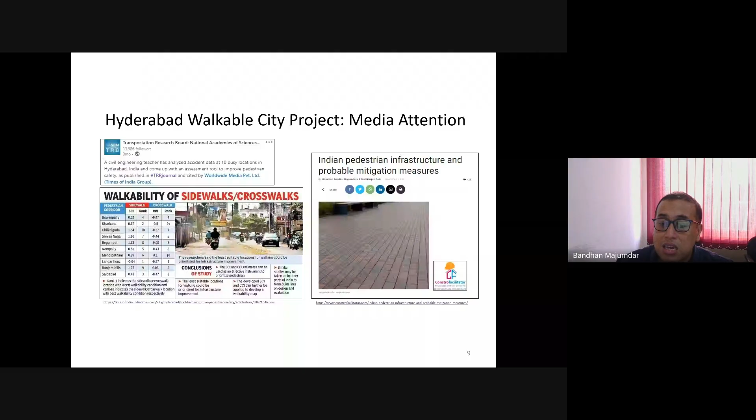This is the Hyderabad walkable city project, where we found out what can improve Hyderabad walkability. This was funded by an NGO. We have also done a Hyderabad Safe City project where we evaluated the entire Hyderabad safety, funded by DST SERB, and some daily newspapers, local as well as national level, reported on that.

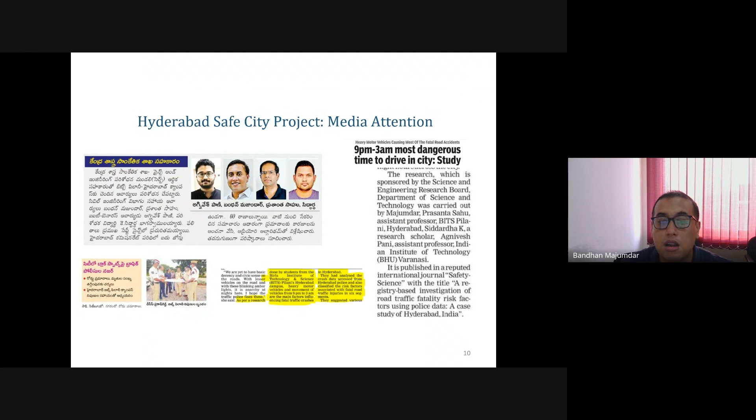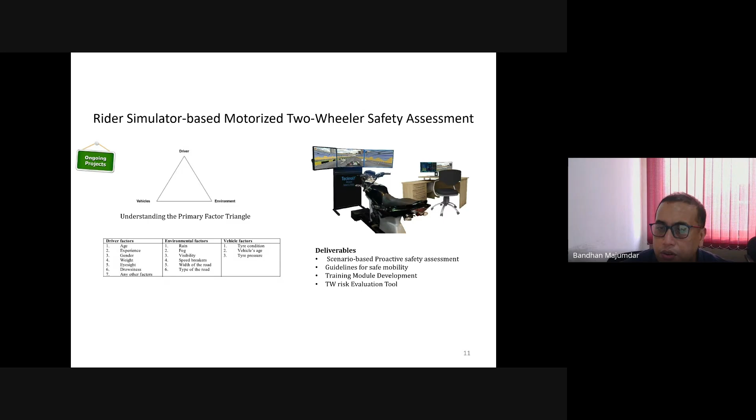We are also doing a project funded by another company, ITSP, where we are providing a complete end-to-end solution for someone who wants to park and ride - multimodal option, parking guidance, park and ride solution, and prioritizing transport all under one application.

We are also developing several 3 or 4 projects, and couple of projects are not here as well, where we are trying to understand how e-mobility or electric mobility through electric bicycle or electric cars can be a successful mode, and we want to test whether people are really going to use that. These are all funded projects - 2 funded by BITS Pilani itself, and 1 funded by Indian Council for Social Science Research, where we are working on different things.

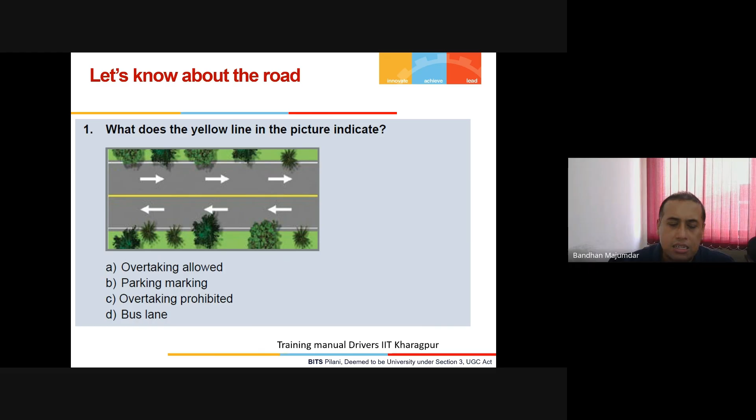So first, let me ask some questions. I am sure a good number of our participants have a driving license, or even if you do not have one, that's okay - maybe budding drivers. So can anyone unmute and tell me what does the yellow line in the picture indicate? A, B, C, D. A participant answered: overtaking prohibited. Very good, this one.

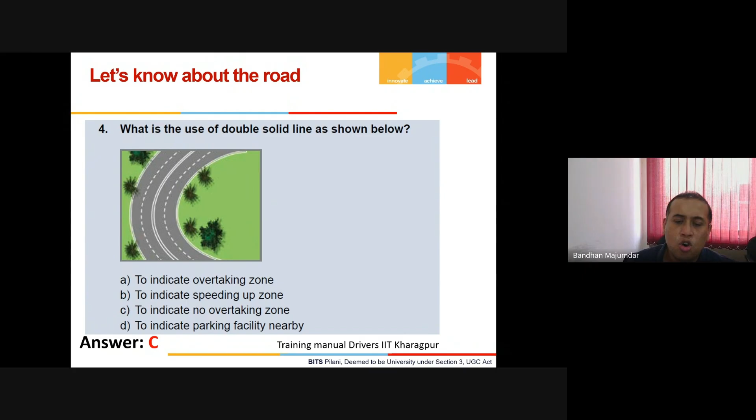To indicate no overtaking zone. This one, can someone unmute and tell?

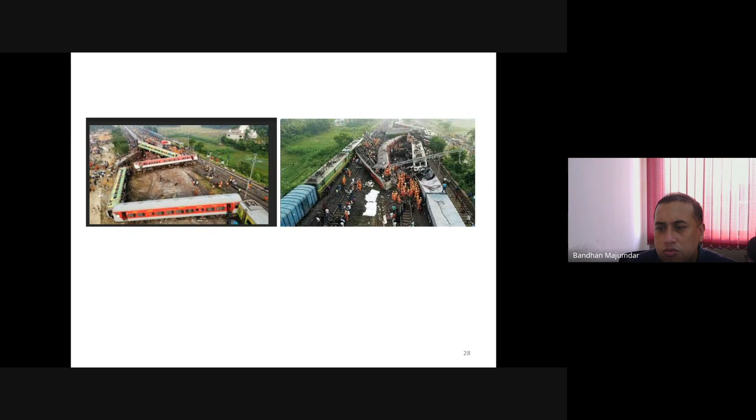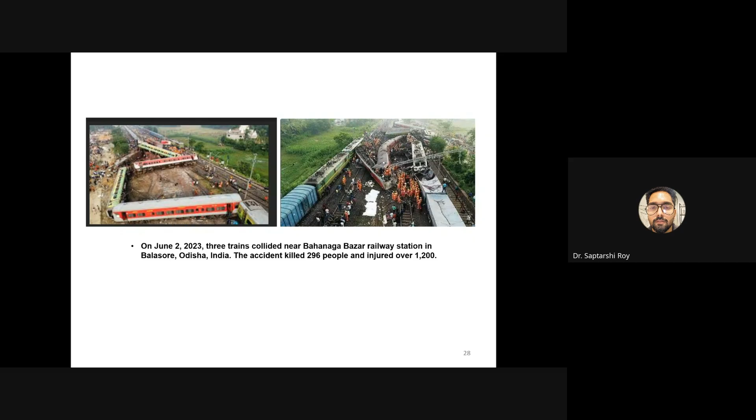This one, which figure does it refer to? Sir, is it the Gyaneshwari Express? Yes sir, near Odisha, the rail accident. What happened was the Balasore. Yes, the Balasore, recently it happened, right? In 2023, three trains collided near Bahanaga Bazar railway station in Balasore. Almost 296 people died and over 1200 were injured. It was one of the most horrific things in our history.

Newspapers may not be hard copy, soft copy is also fine, maybe through mobile or laptop or tab, that's fine. Yeah, someone answered, but I can't check the messenger box. If someone can tell.

Someone can unmute and tell, I am not able to see the messenger box. I can see that later, then again I have to check.

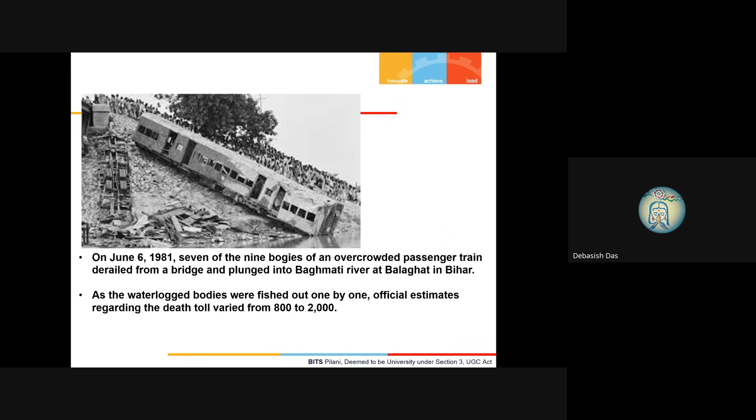I think everyone has read the newspaper, very good. What news did you read? Someone please unmute, one of the participants, please unmute and tell what news. Sports, you read sports news, sir.

Sports news, entertainment news, and right now I think many of the political news. Indian states are having elections - West Bengal, so last 2-3 days we are continuously checking election results. Similarly, Tamil Nadu, Kerala, Assam, Pondicherry, all are having their respective state legislative assembly elections.

And similarly, specific countries' elections we follow. But if you remember this train accident when it happened, did you follow this news on newspaper? Yes sir, I think yes, majority of us followed.

Why? Can you tell me, this one or the Ahmedabad incident, where in the newspaper it came? Sir, in the front page. In the front page, that's precisely it.

Road safety, road accident - I am not diminishing, any accident is bad, but road accident, do we see generally road accidents in front page? No. We see one when Rishabh Pant collided last time.

Rishabh Pant, the Indian cricketer, if you remember, he met with a horrific accident and his vehicle actually had a lot of these things, and he somehow, by God's grace, he survived.

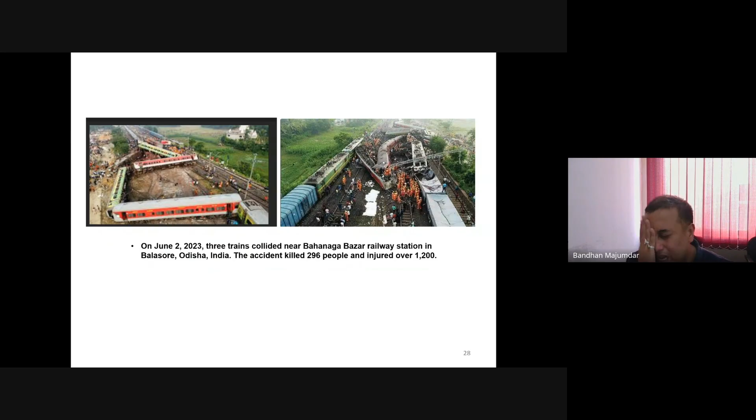Of course, train accident or a flight accident is horrific. Any accident, a single death of life is not acceptable. But if you look at it very carefully, the life being taken up by road accident is way, way more. Does anyone have an idea how many deaths we have due to road accident? Any value?

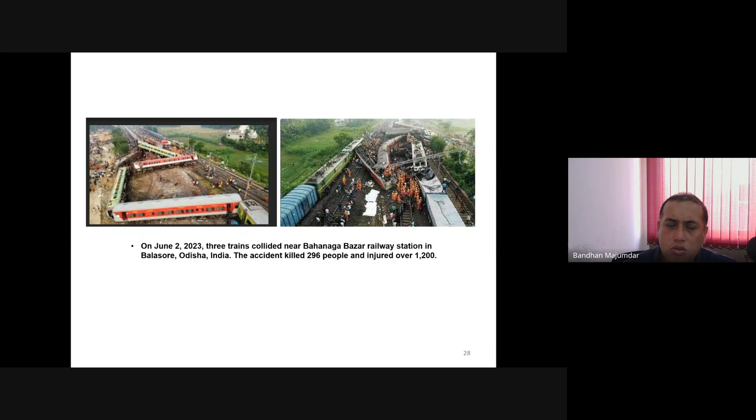Okay, let me give. In India, more than 1,77,000 people are killed each year in traffic accidents. That's about 485 fatalities a day, one death every 4 minutes. So we are speaking around 20 minutes.

I am speaking 15 to 20 minutes, I guess. So by that time, 4 to 5 people have died in road traffic accidents on an average in India. This is every day 485, so all should be first page, but that much sensitization is not there, which is a problem.

That's why we all need to stand up together and do the needful. That's the need of the day. So I hope after this, of course, we will discuss some engineering aspects, but understanding the social context and why it is important is also necessary.

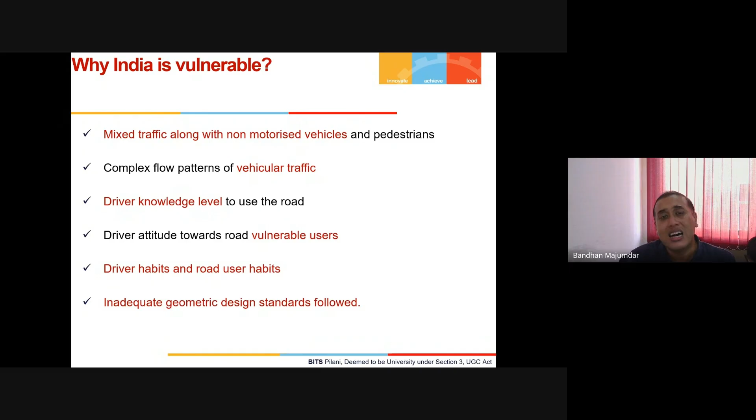And of course, driver habits, road user habits, inadequate geometric design—all those things actually compound and make India a vulnerable, crash-prone country.

What are the pillars of road safety action? When the UN took it up and developed the sustainable development goals, the UN in coordination with the World Bank and other agencies found that 5 pillars are most important for a road safety action plan. Pillar 1: we should look at road safety management.

Pillar 2 should specifically focus on safer vehicles. Nowadays, most advanced level vehicles we are getting have ADAS or high-level technological solutions which can help improve the safety scenario.

Pillar 3: safer road users. Safer road user means how people can use the road safely. This is on us, engineers and planners, to find out the reasons and provide sufficient evidence-based countermeasures—that if you do this, this will improve.

A small example: we have done a lot of road safety audits across the country, and we have faced various scenarios where there is a school along a national highway, and people from the village need to go to the school on the other side of the highway. How will they go?

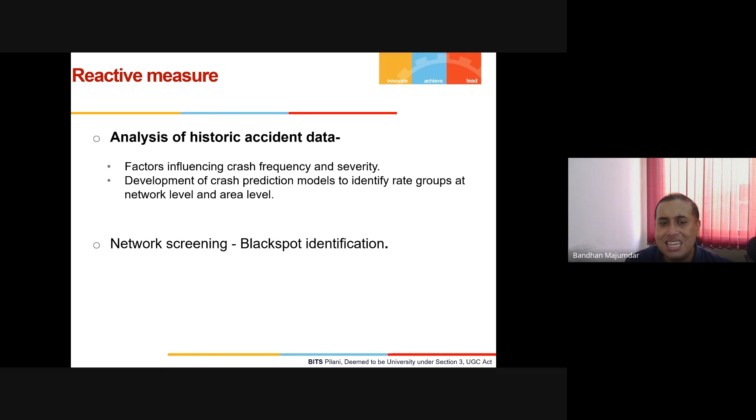So what is reactive measure? We analyze the historic crash data, we find out the black spots. I'll just again - there are a lot of things, I will not go through everything, some aspects I will do.

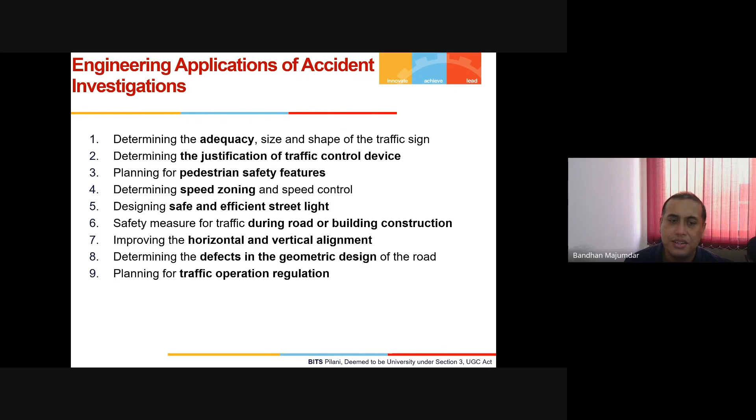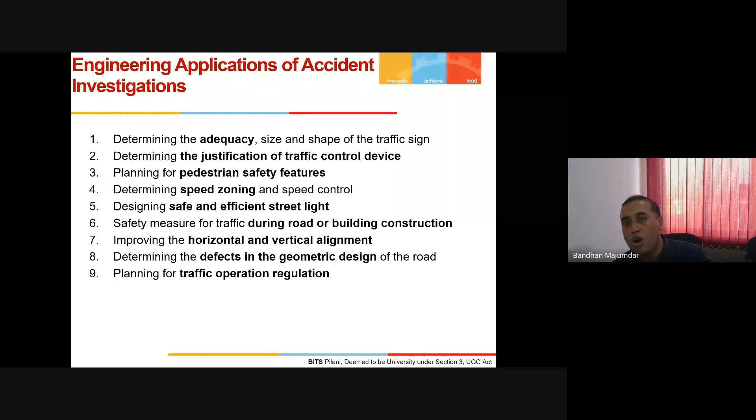The main idea of the engineering applications of accident investigation is determining the adequacy, size and shape, determining the justification, planning for pedestrian safety, identifying the speed zoning, safe and efficient street light safety measures, improving horizontal and vertical alignment, determining if there is any geometric design defect, and planning for traffic operation and regulations. These are the engineering applications of accident investigations.

How did we used to find it? Now we have all crash data in Excel. So with proper permission and proper channel, if we go, we can get the crash data from the traffic police department of every state. Now, because there is a Supreme Court road safety committee where they have to submit regular interval reports, so that is there.

But it was not there while I was doing my PhD in 2014. That time I was doing it in Kharagpur, so some locations in Birbhum, a state nearby, there were also a lot of crashes. So for that, some investigations we did. That time we had to go to the police stations and find out the First Information Report, or FIRs. The FIR would provide all the details - the district, PS, year, FIR number, what happened, address, exactly what happened there, what was the problem, what was the vehicle, all those things. From there we had to actually extract the data and do some analysis.

But now that thing is gone. We can directly get the Excel-based data, because police also now do not enter this kind of handwritten notes. Rather, they also use tabs and improvised applications where the data directly gets stored into the Excel sheets.

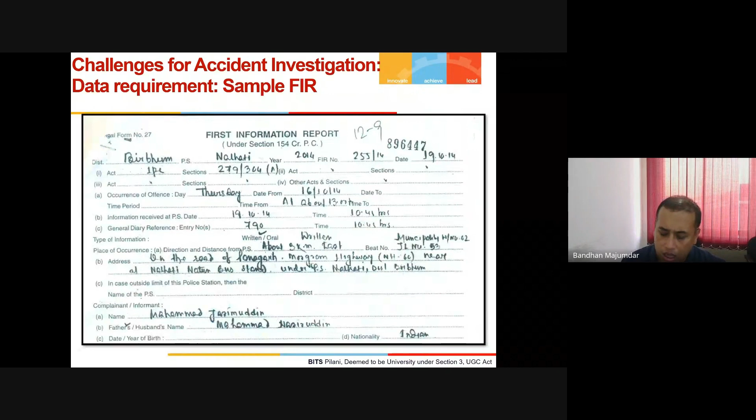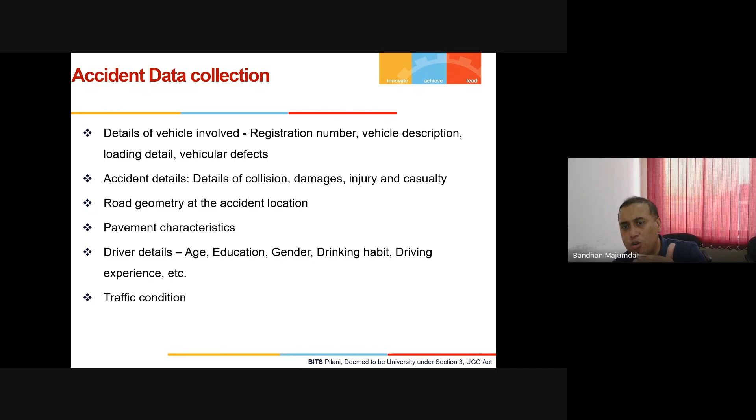So we collect all types of data: vehicle involved, traffic condition, road geometry, pavement characteristics, driver details, and so on and so forth. Again, in some of the components I will go a little fast. I just want to show you this is there, but I would focus on more important things later on.

For all kinds of road safety accident locations, we develop diagrams which we call a condition diagram and a collision diagram. A condition diagram gives us an idea of whatever is there at the location: if there is open space, vehicles, trees, a school, the road dimensions, all those things we get from the condition diagram.

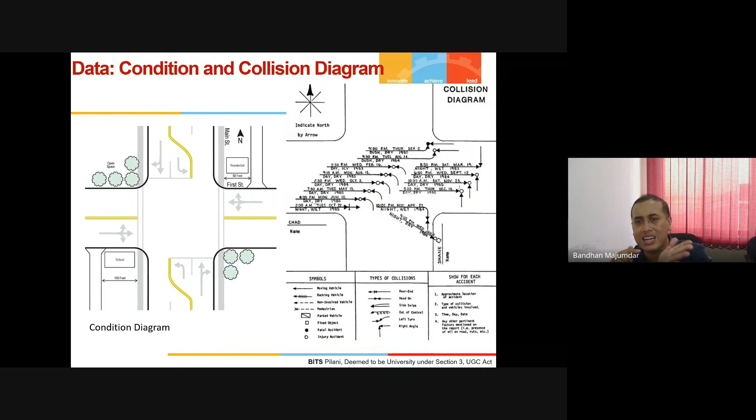In a collision diagram, every collision is recorded: a rear end collision is when one vehicle's end hits another vehicle's end. When both hit front to front, that's a head-on collision. If they get swiped sideways, that is known as sideswipe. These kinds of accidents are reported, and from that we can find out patterns.

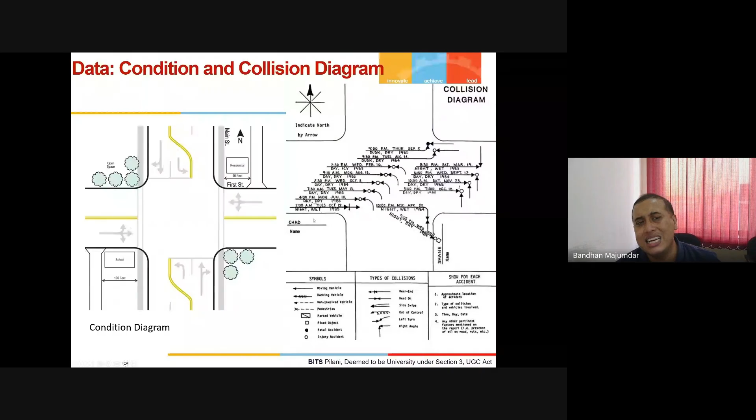So these are the different types or models of how we store or deal with accident data. For all crashes, we have to develop both condition and collision diagrams.

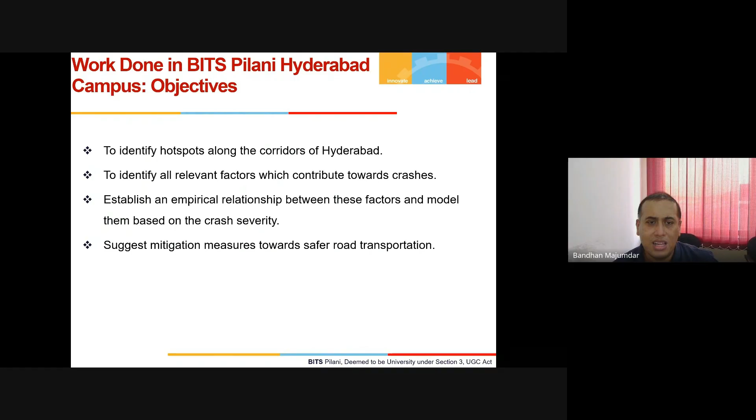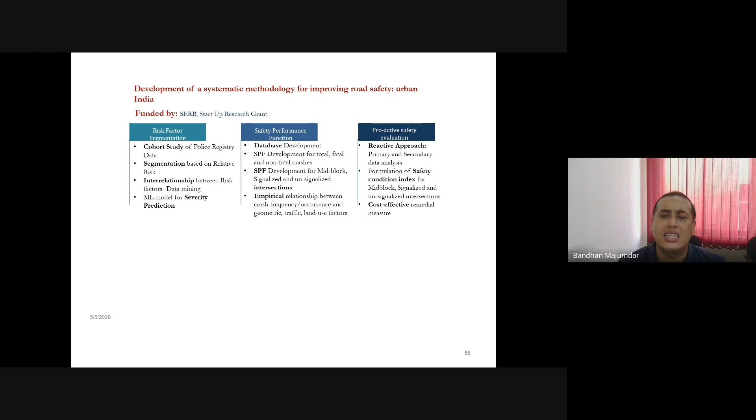Now I will go back and we will directly discuss some component that we did in Hyderabad. One of the projects we did there was part of the reactive methodology, data analysis based methodology; we did both reactive and proactive work.

We found out the risk factors, what actually influences road safety crashes in Hyderabad. Can we predict the future numbers? What will be the future number? Can we predict the future severity, whether it's going to be a fatal or non-fatal crash? How can we proactively evaluate safety and give recommendations? All these things we tried to understand.

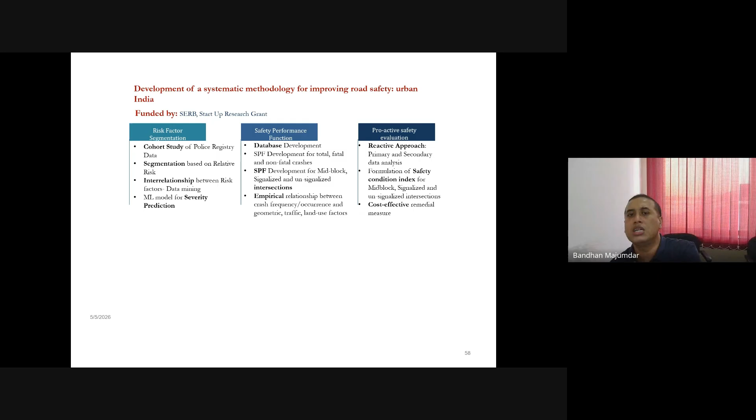With this project we found the risk factors, the safety performance functions which predict crashes, and also the key locations across the city that are crash prone.

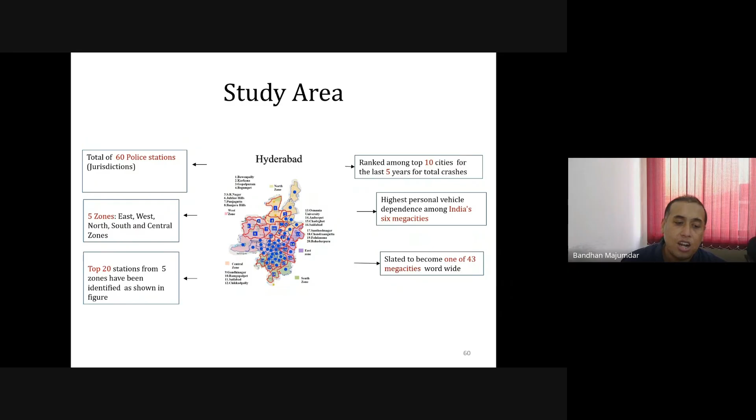Hyderabad has 60 police stations, divided into 5 zones, but it's difficult to analyze all 60 stations together. So we took the 4 most important or crash-prone police stations from every zone, identifying 20 stations in total.

We wanted to identify the road traffic fatality risk factors, understand the interrelationship between them, and propose a segmentation technique.

Again, I will come back and show it here directly. There's no point going through it this way, I will go back and show it.

Basically, I would like to tell you one thing. I think most of us nowadays hear the term machine learning, right? How many of you work in machine learning? I mean more than the participant sites—how many participants here, or even the faculties from HIT, work in machine learning? I think many of you do. Am I right or wrong? Yes, sir.

Today the entire road safety and transportation decision making is dependent on data. We get a huge or significant amount of data, and we need to analyze it using various machine learning, data mining, and clustering techniques.

Now that's a cautionary thing. For your information, we regularly host courses specifically on machine learning fundamentals. We strongly believe machine learning is a very important buzzword. Nowadays everyone hears this buzzword, machine learning, machine learning, and everyone is using it.

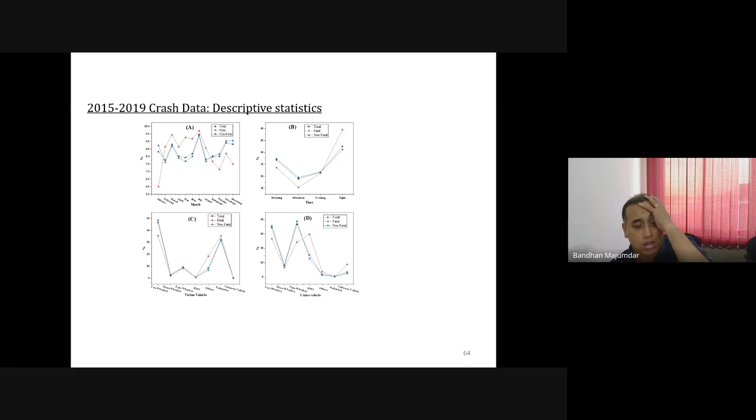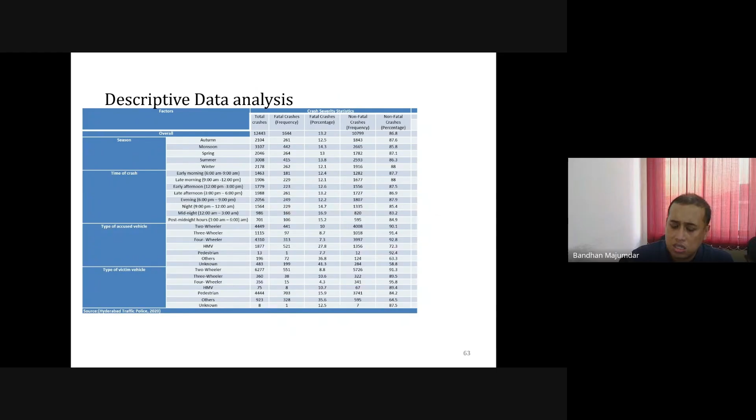With the lot of crash data, we have calculated 2015 to 19 data we have analyzed. Now we are in process of getting the latest data and analyzing. We got total data, season-wise data, time of crash-wise data, accused vehicle-wise data, vehicle data. Apart from that, we also collected traffic volume of those locations, speed, geometric characteristics, and all other things, traffic data, volume data, all possible data on those locations of the crashes across the entire Hyderabad we have collected.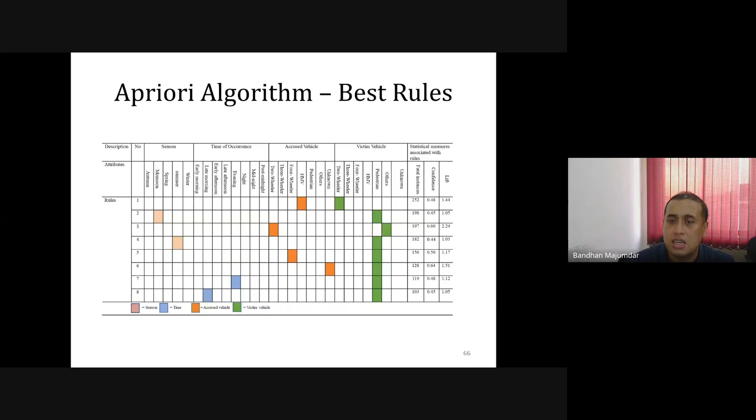Then we have used some data mining techniques and some advanced machine learning techniques. I am not going to go into the detail, it will take too much time. Just to give you an idea, for the entire factors we have divided into 1, 2, 3, 4, 5, 6 segments. Each segment, we have got some criteria how we have done the division. I am not going through it. We have our papers as references, which one can refer if interested.

We have done some cross-sectional study, and some a priori algorithm-based study, which is data mining and machine learning. We have combined these to find out the factors, and we have identified risk factors like heavy motor vehicles, unknown vehicles, pedestrians, and others as accused and victim vehicles respectively as very high risk factors. Similarly, if the accused is pedestrian or four-wheeler is victim, autumn, spring, or winter as season are extremely low risk factors. This gives us some idea on what factors are more important, which are less.

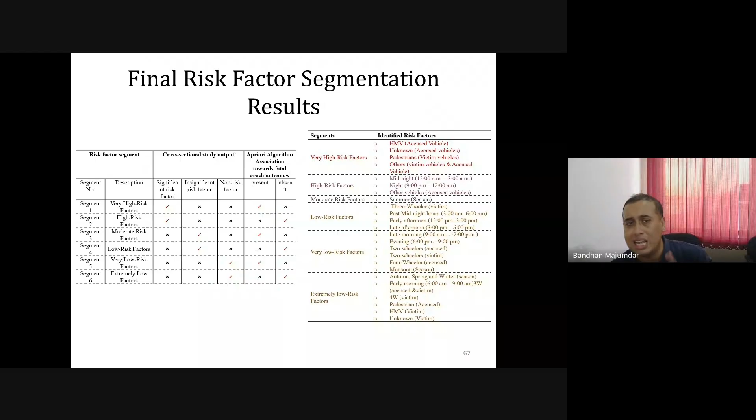A junction where there is signal is known as a signalized intersection. Where there is no signal is unsignalized intersection. In between two signals, that road where no signal is there, just vehicles are moving - that is known as mid-block. For all these three places, we actually developed crash prediction models and tried to find out how do we improve the road safety scenario.

And we have also developed some sensitivity analysis, some binary logistic regression models - let's not go into that. But the idea is all attributes we can analyze, and these kinds of results, if suggested to the government, lot of good things can happen, and we are also constantly in touch with the government and suggest them.

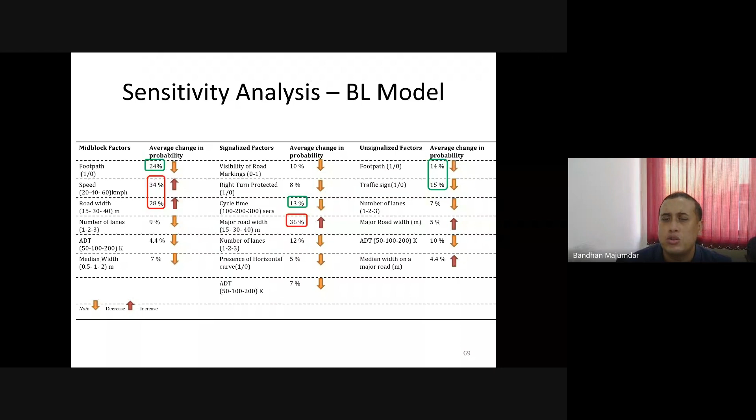What we have found out, like we discussed: HMV, inappropriately designed speed calming measures, overspeeding of trucks, less education and training campaigns which is mandatory for them, regulations regarding drivers' work schedule, constant surveillance by authorities which is important for HMVs. Similarly, unknown vehicles - lot of unknown vehicles are accused.

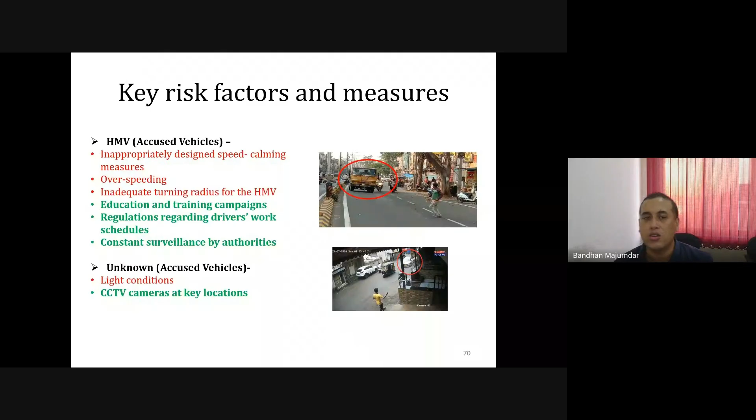So CCTV cameras should be at key locations where we can actually see. Here if you can see, this vehicle is actually hitting this two-wheeler - that video we have just captured. Once this vehicle goes, it is not there anymore, so it will be taken as unknown vehicle. So now with the advent of technology, this thing should be taken up properly, immediate action should be taken.

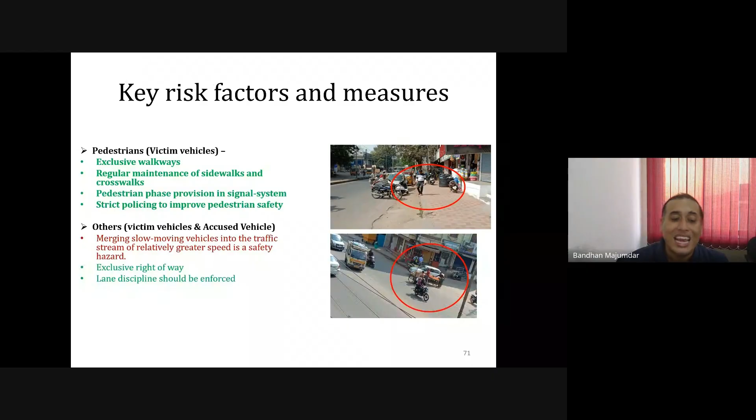Similarly, pedestrian and victim vehicle - most of the cities pedestrians are very much ignored, there is not much aspect of that. So exclusive walkways, regular maintenance, pedestrian phase in the signal, and from others merging slow moving vehicles into the traffic stream, relatively greater speed, exclusive right of way, lane discipline - these are key risk factors.

Then we have also done the proactive approach. We have developed for all attributes which are the major attributes for risk. So we have done expert level surveys, where we can actually go to experts and ask them their perception. For that purpose, one of the extensively used multi-criteria decision making techniques, which is AHP or analytical hierarchy process, we have used.

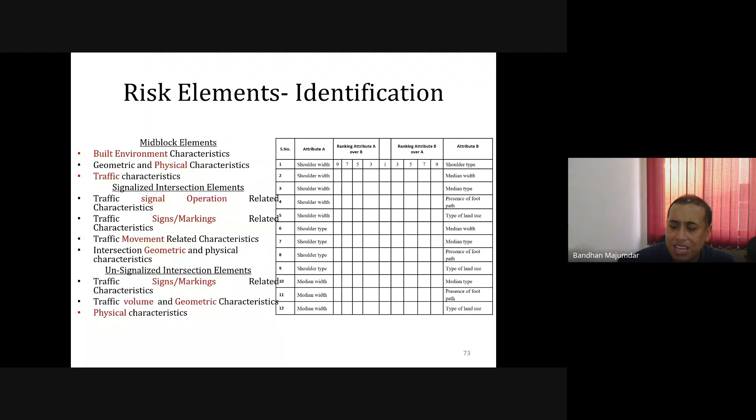Using which, we have taken mid-block, signalized intersection, and unsignalized intersection. For them different attributes we have taken and we have tried to find out the weight. So as you can see, for mid-block it is MCI, for signalized intersection SICI, and for unsignalized you can see unsignalized condition index.

We have developed, using inputs from experts via analytical hierarchy process, different equations for different types of roads. I won't explain the theoretical aspects here; if anyone is interested, please reach out to me and we can discuss.

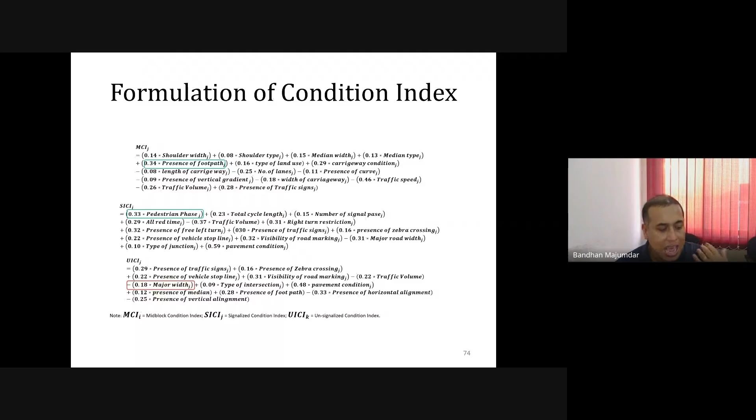Now any engineer, planner, or even a person with basic information on the road can actually find out the condition of signalized intersections, unsignalized intersections, and mid-block locations across any city. This is one of the fundamental contributions.

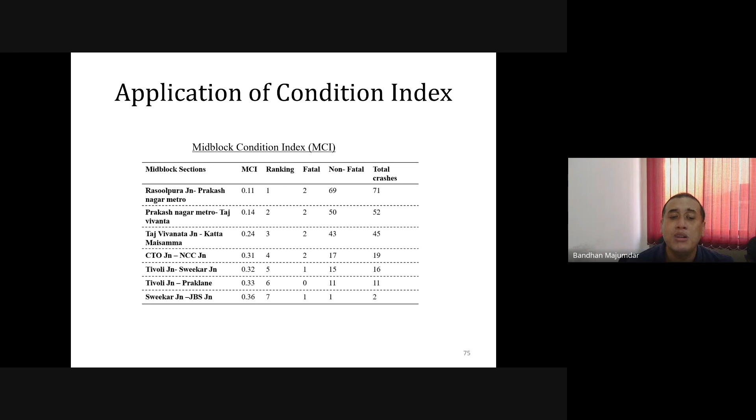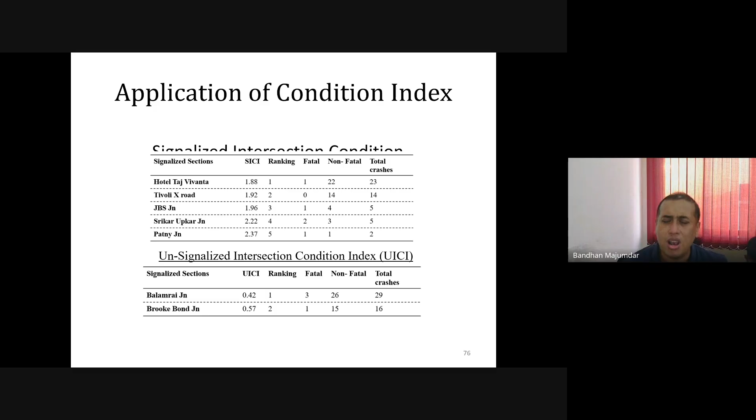With this, we have rated or ranked all the mid-block locations of Hyderabad. Some samples are shown here—mid-block, signalized and unsignalized locations under one police station. We've done this for all locations, but here we show a sample, and these kinds of analyses can tell us more.

We have also looked at the number of crashes, where they happened, and why. Now we wanted to give some countermeasures. Once again we found that overspeeding and loss of control is the most occurring crash type. How do I improve that?

We identified some countermeasures, and again went to experts and asked them to give us weights. Then we tried to see which particular countermeasure can be applied in the field. For example, for overspeeding and loss of control: pedestrian barriers and dedicated spaces, provision of curb extension, and roadway lighting are countermeasures that can be taken up.

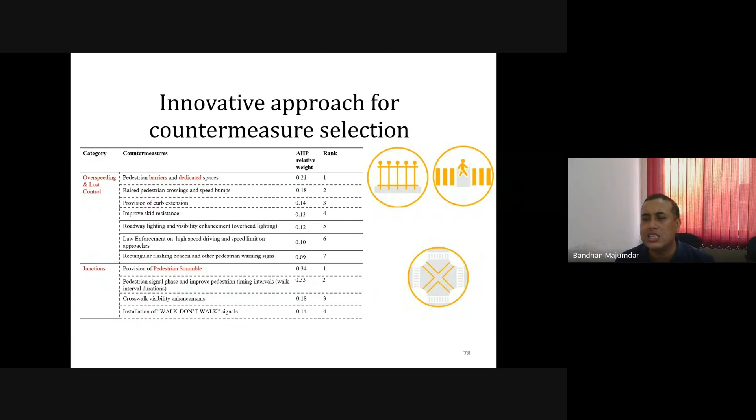Similarly, at the junction, pedestrians remain one of the most important aspects. So these measures give us a novel approach to understand road safety, apply it in the field, and provide policy suggestions to the government. That was one of the major contributions of the study.

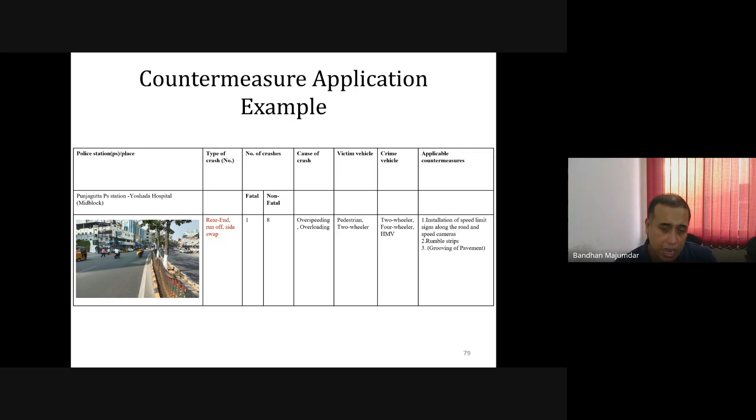So what we have given to the ACRB, DST, and the government includes: police station, location, type of crash, how many fatal and non-fatal crashes, cause of crash, victim vehicles, offending vehicles, and applicable countermeasures. We identified all these things and provided solutions, and we feel this is a unique addition to Indian case studies, as shown in the previous press releases.

So this is the overall Hyderabad city specific data that we discussed. Now I would like to discuss the proactive measures of road safety.

Now, road safety audit—how many of you are aware of this term? I'm sure some of you are. The term 'audit' we're all aware of, right? Every 31st March, our accounts—whether a bank account or wherever we are working—undergo audits, where a third party comes and checks our reports and records to see if everything is in order.

Similarly, to check the road safety scenario of a location, a road safety audit needs to be taken up—starting at the very beginning, the DPR stage. When a DPR of a road is being given, it should be taken up at the construction stage, during the design stage, then at the operation and maintenance stage, and again before the official commercial opening. At all these stages, road safety audits should be done. That's the proactive measure of road safety which should be taken up.

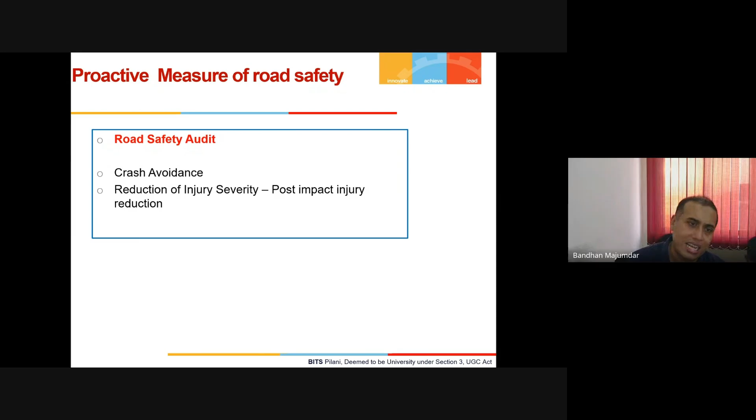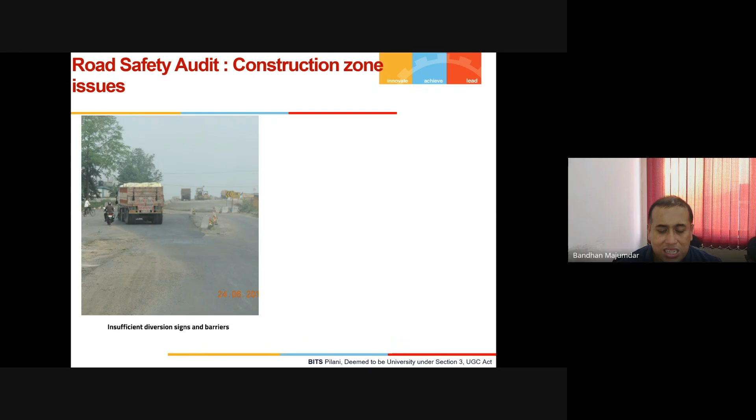So there's insufficient design of diversion signs and barriers, and the design of super elevation is not correct. Let's take a closer look. Can you see the gap between the crash barriers is quite wide? So at night time a car or two-wheeler can come inside and there could be a crash. Yes, that's one of the challenges.

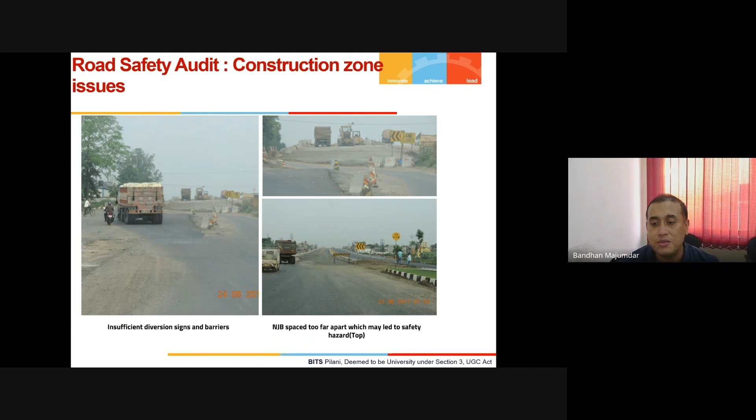Similarly, here similar type of issues can be seen. This one, I forgot to remove the animation. So this shows working beyond work zones without delineator cones. Cones can be surrounded and they can be spaced here.

Without that, a road safety auditor or civil engineer in charge of the project can stop the work. We have done that in many projects where we were auditors or consultants - we went to the road, saw this kind of thing, and actually stopped the payment to the contractor. This is violating the safety requirements.

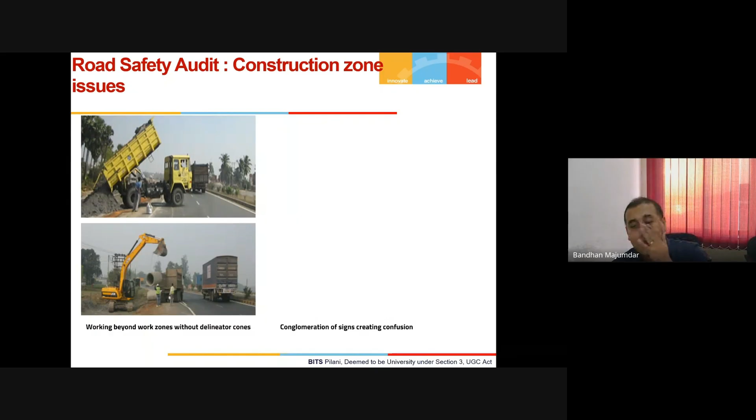And if some vehicles on the road are doing certain work, there should be reflective tapes on the vehicles, because at night time they will only be visible to other vehicles if they have reflective tapes. So those also we need to carefully look at and then suggest improvements.

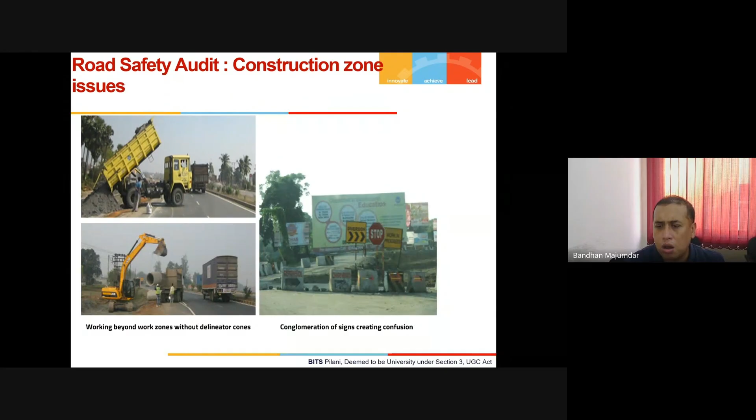Similarly, as you can see here, there's a conglomeration of signs creating confusion. So as you can see, a lot of signs are there, so we're not very sure what to do, where to do. This is again near NH2, near Durgapur to Barwa Adda towards Dhanbad.

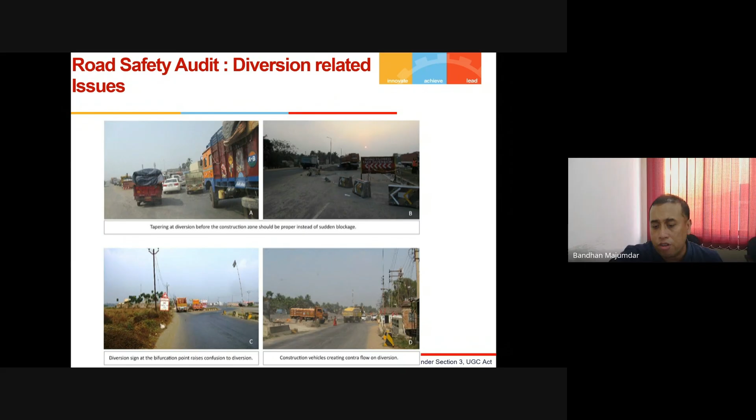Similarly, tapering in diversion before the construction zone. In the construction zone you can see a lot of debris kept there, and construction vehicles coming from the opposite side. Those are some of the diversion related issues. What is the problem? What should be the solution? Anyone, or is it fine?

Sir, I don't think this is the correct type of barrier that should be present. Absolutely right. Whenever there is a construction zone with open reinforcements, it should be completely covered, because otherwise there's a chance some vehicle may come here and it will be a straight away fatal accident, with no coming out of it.

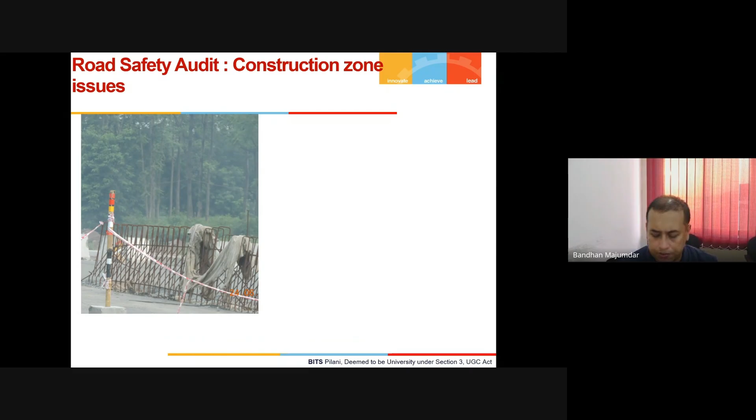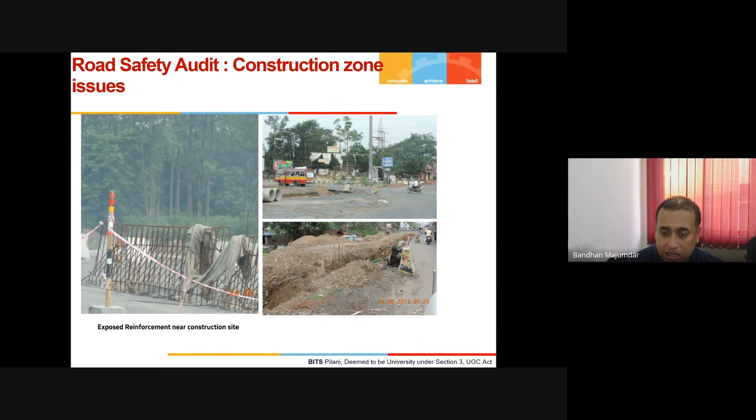Similarly, this is again very near Durgapur, captured during an audit in 2012 or so. As you can see, this huge construction was going on, or a little bit ahead before that it's also possible - I don't remember the exact date. There are these big holes where vehicles can actually go. This is a 2012 diagram showing big trenches where vehicles can easily go. These aspects are really horrifying and need to be addressed.

This one we have all seen - unauthorized crossing issues. How do we correct that, or what is the problem? By proper monitoring. So on a road, if you see hundreds of crossings, it's very difficult to monitor.

I don't have a right or wrong answer, but your point about raising the height of the divider, by raising the size of the divider - yes, this could be a better solution. But even where this has been done, people are still trying to cross. So it's about people's behavior. That's why as engineers, our perception and our approach is very important. We should actually help people understand, and how we can improve those things is a very important consideration.

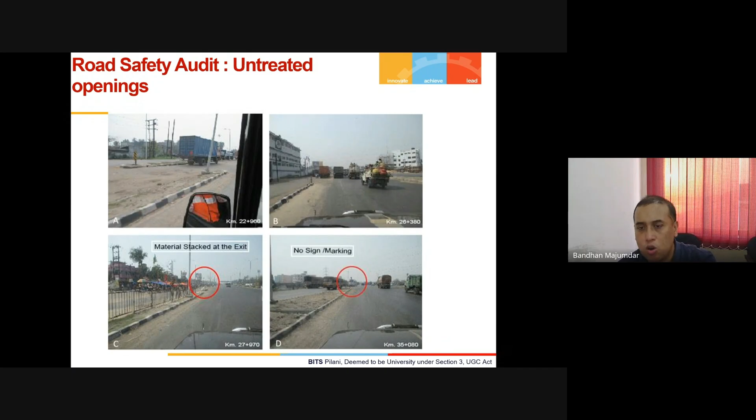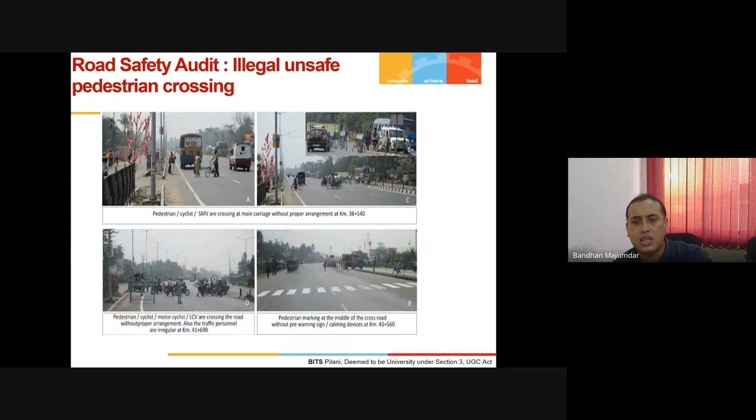Untreated openings is a big issue across various places. As we're coming towards the close, I'll take you forward. Similarly, median opening is a huge issue across national highways in India, needing to be addressed at the earliest. Pedestrian and cyclist crossing at the main carriageway without proper arrangement is a general feature.

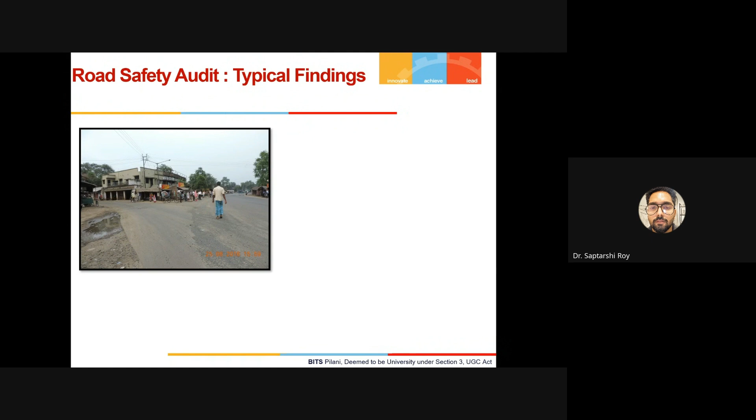Very good, so you are actually taking the road safety audit. What are the key points? This is one way we look at all the things. We have a checklist, we have IRC codes - IRC SP 88, IRC SP 55. These codes are there where very clear guidelines are given on what to check and where to check. We do that, find out, and give the responses.

Nowadays, with the advent of AI and improved machine learning capabilities, we are trying to develop software which we run with the video. They will automatically tell what the problems are. Those are the things we are trying to address.

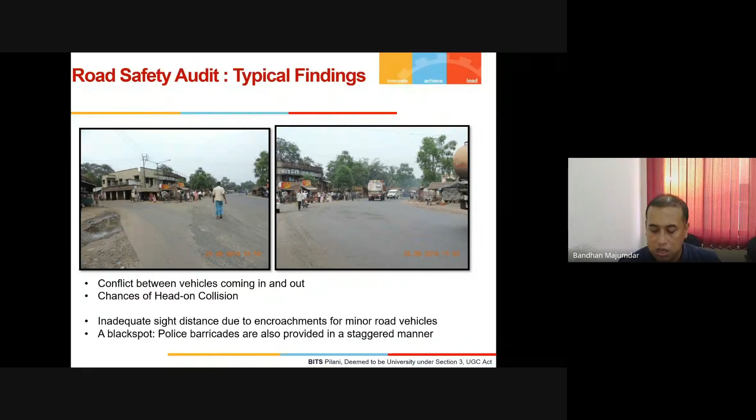Again, from this drawing, if you see conflict of vehicles coming in and out, there is a chance of head-on collision, inadequate sight distance - black spots are there for that reason. That's why, if you see here, what they have done is police barricades provided in a staggered manner just to reduce the speed. Again, a lot of other things can be done here as well.

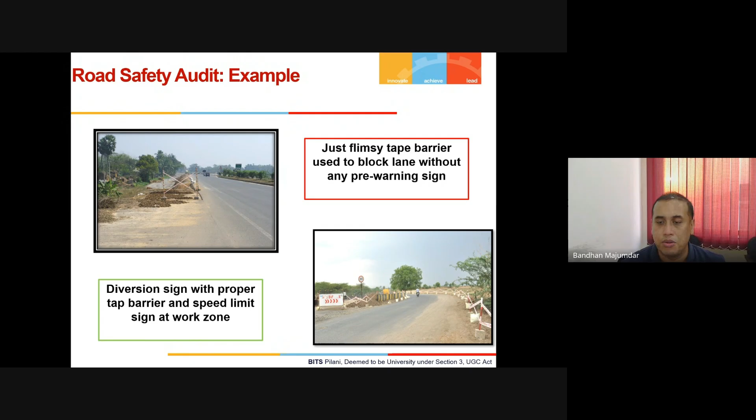So this is some of the bad example - flimsy tape barrier. This is a good example. Again, because time is short, I will just go ahead.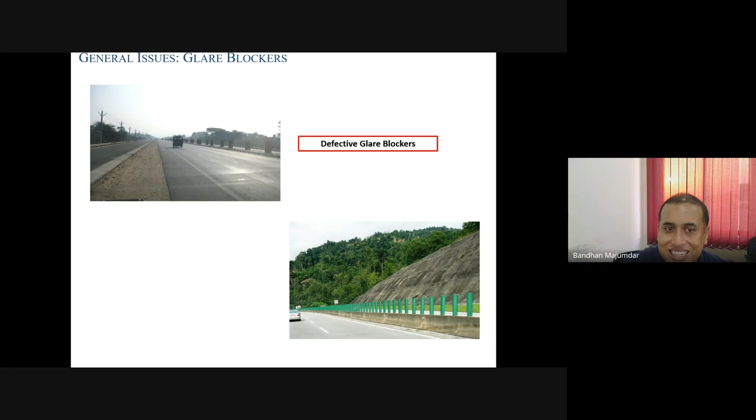As you can see, in some locations glare is a big issue. When the glare from the other side light comes to our eyes, ideally we should provide at least green cloths. The best solution is providing these green bars, which are basically appropriate glare blockers, correct glare blockers. Many places in India nowadays, they are in place.

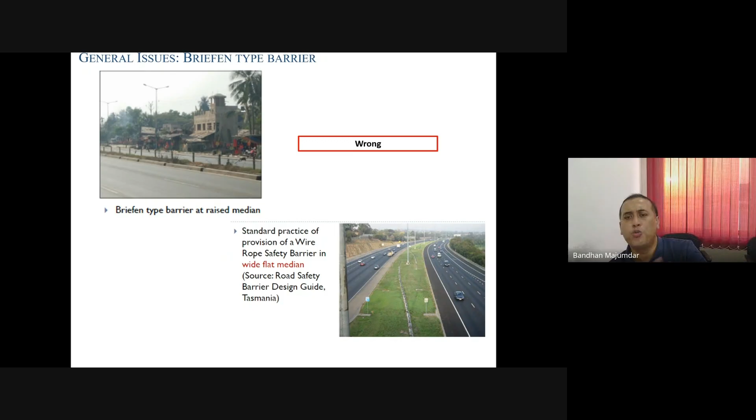Some types of road barriers, I will not go into details. In West Bengal, while doing audit, when I was doing my PhD, I took some photos so you will be able to see some of the locations we have seen - congestion,

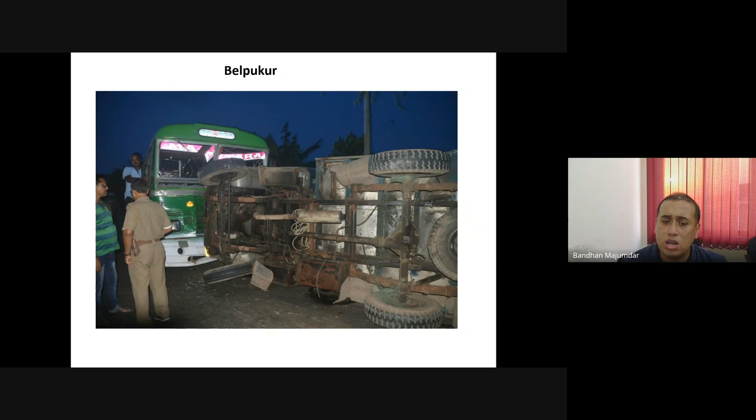pedestrians are coming everywhere - this is Amtala, one of the locations there. Belpukur, another location, we have seen a head-on collision. Near IIM Joka, no pedestrian facility absolutely. Again, near Hotuganj, South 24 Parganas, shoulder encroachment by auto, significant edge drop as you can see.

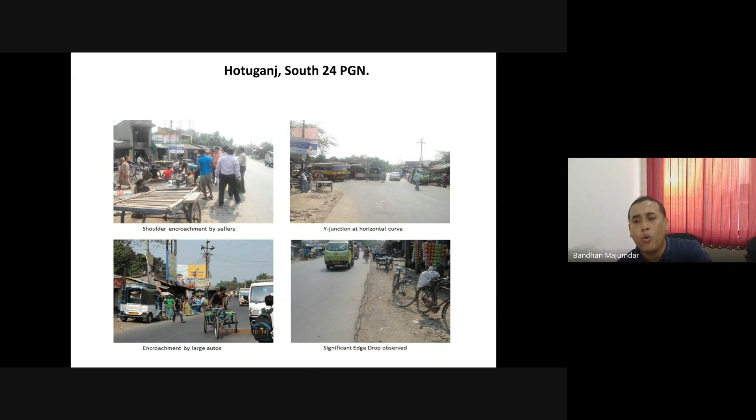Y junction at a horizontal curve, lot of issues. Towards Diamond Harbour, again a sharp curve where the speed limit is not there. What is the problem? It's a sharp curve. So if you see here, if some vehicle is coming at very high speed, they cannot see because so many trees are there. This is from 2016, long back, but these photos, village-wise, after that we have done a lot of work on urban sections, but for village sections, these photos are still truly relevant.

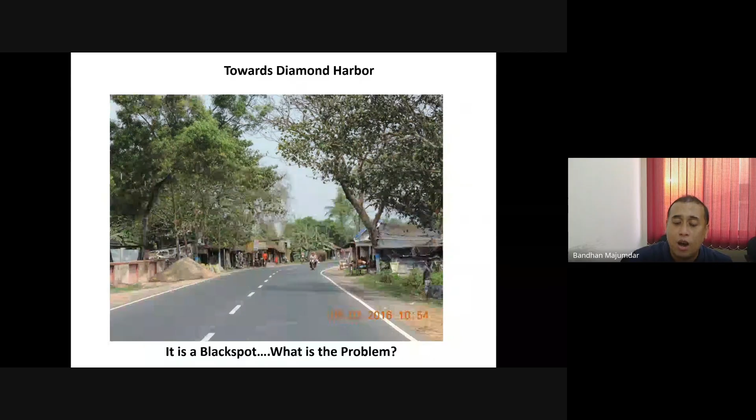So these are some of the overall road safety aspects that I wanted to give you - some engineering measures, some of the work we have done, some machine learning aspects, some engineering aspects, what is a black spot, how do we identify it - all those aspects I wanted to cover, because in a short span.

Now again, before closing, I would like - that's my way of communicating - so that at the beginning and at the end we can interact together. So which of the below is a speed breaker sign?

If anyone can answer - say B. B for Bombay. Yes sir. What does A indicate? Can anyone tell me?

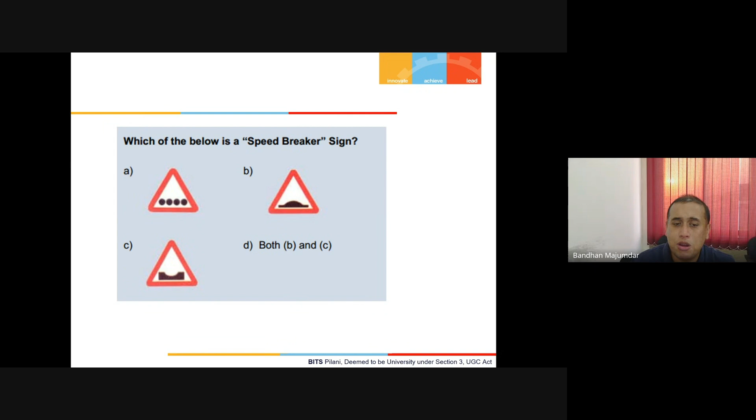This sign is for indicating that there could be a blind person crossing the road. So B is the right answer. This one...

Okay. Sir, I am Dr. Saptarshi Roy. I have no question - I personally thank you for this wonderful session. I have been very much benefited throughout this 1 hour 50-minute session. I wanted to thank you, that's why I opened this chat. Thank you, sir. Thank you, Dr. Roy. Sir, I have one question, sir.

Yes, Dr. Das. As you said, or as we all know, road safety audit is mandatory for all kinds of roads. So is it also mandatory for rural roads?

Yes, for rural roads under PMGSY, there are two types of roads. Generally it is mandatory, and it has to be done by empaneled auditors. But generally what happens is only ADB funded projects which are more than 5 kilometers get audited. Others are checked at the design level and just left. But generally, yes, for a minimum length of 5 kilometers, road safety audit has to be done.

Okay, so any other question from anyone, or then I will conclude the session.